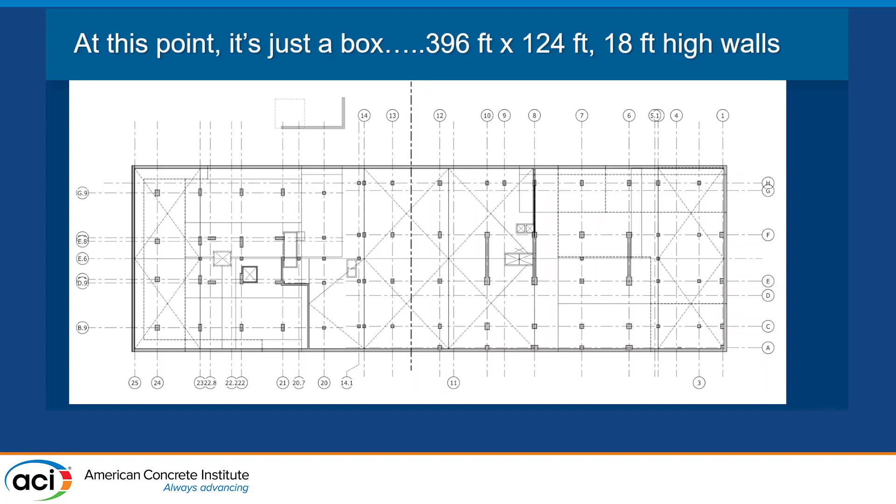Because the two of them go hand in hand—the longer it takes to build a building, the more expensive it's going to be. And it's a pretty simple building, just a box, for goodness sake. It's almost 400 feet by about 124 feet. That's about as simple as it gets, right?

So the concrete contractor says, 'Here's how we're going to do this. I'm going to use one set of forms. I'm going to pour 40 feet a day. I'm going to put the reinforcing in, pack the form up, pour it at 2 o'clock every day. I'm going to come in at 6:30 the next morning, strip the forms, and we're going to do the same thing over and over again.'

How many pours is that going to be? 26 pours, maybe a few days up front and in the back to load in and load out. We're done in 6 weeks. That sounds pretty good because that's a lot of linear footage of wall. So if we start in April with the foundations, we could probably start the walls in May. We're done by Flag Day.

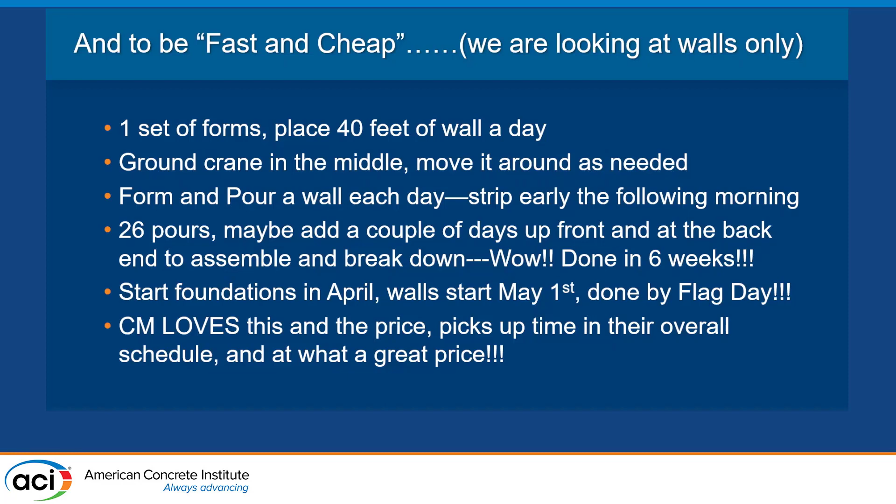And the CM just absolutely thinks this is the best news he's ever heard. He loves it, he loves the price. So he says, this is what we really want to do. The owner's very pleased at this bargain of a price—it literally is the best deal he's ever seen. Now he goes to his A&E team, his licensed design professionals, and they start developing a set of documents. As it flows from schematic to design development, now they have some drawings, plans, and specifications.

And the owner directs it passed on to the construction manager so we can get a reality check on the pricing. These documents are starting to include things like sections and details, more information than a schematic design. The important thing here is the licensed design professional applied their standard details and toolkit, their specification language that they've developed as standard practice. That's what they're comfortable with. It's important because maybe it's a project in their backyard, they're very familiar with the market. Or it might be a project that's not in their wheelhouse, maybe 5 states away, and they have no idea what the standards are in that market.

So it would seem that the licensed design professional read the responsibility in concrete construction document, which has a pretty cool statement here. We're talking about responsibility, right? I'm not going to read it for you, but the key words are, so as to meet the owner's final design criteria. You heard Frank talk about it, you heard Calvin talk about it. Making sure that you're serving the owner to the extent necessary.

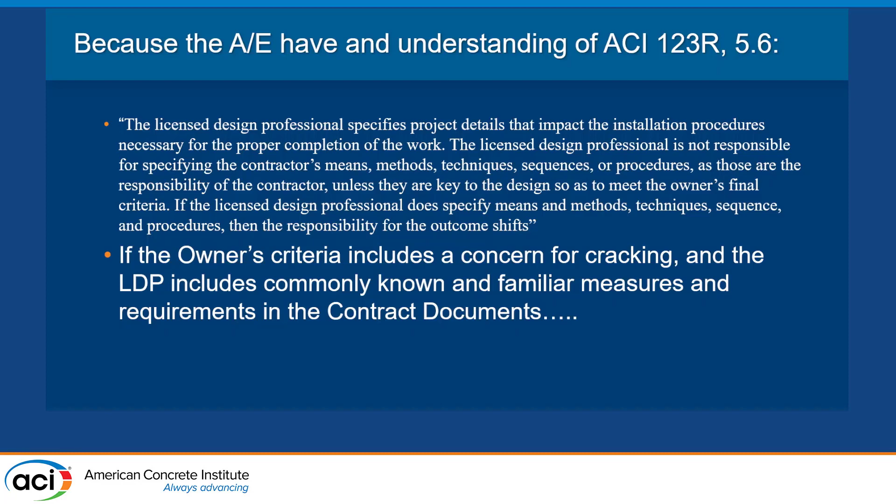And if the licensed design professional does specify means and methods, techniques, sequence, procedures, then the design professional has a little bit of responsibility for the outcome, right? That's what it says. If the owner has a concern for aesthetics or cracking or serviceability, whatever that may involve, the licensed design professional will include those measures with which they are familiar, and they put them in these documents, included in their judgment for crack control.

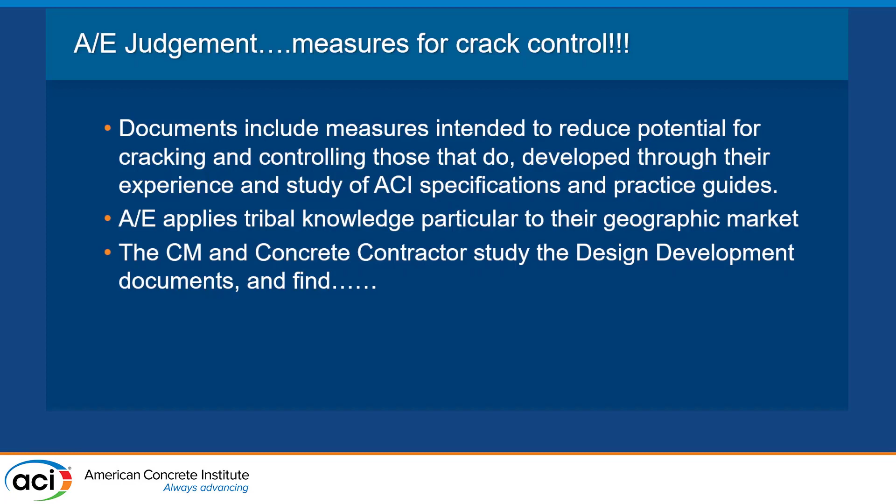And we're talking walls only here, by the way. You saw some pictures from Frank and Cal that talked about slabs and other things, mass concrete, but we're just going to talk about walls because it's really easy, and it narrows the field as to what could possibly be a cause. So they're going to include the measures they've found to reduce the potential for cracking, not stop the cracking, control the cracking, reduce the potential for uncontrolled cracking. They're familiar with the ACI specifications and practice guides, have some tribal knowledge of their market, and they issue some documents. So the construction manager, concrete contractor, get a look at the drawings.

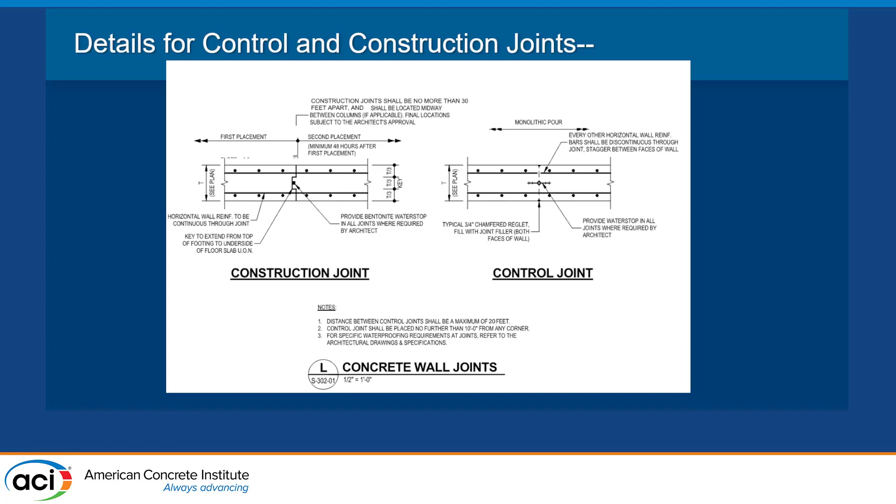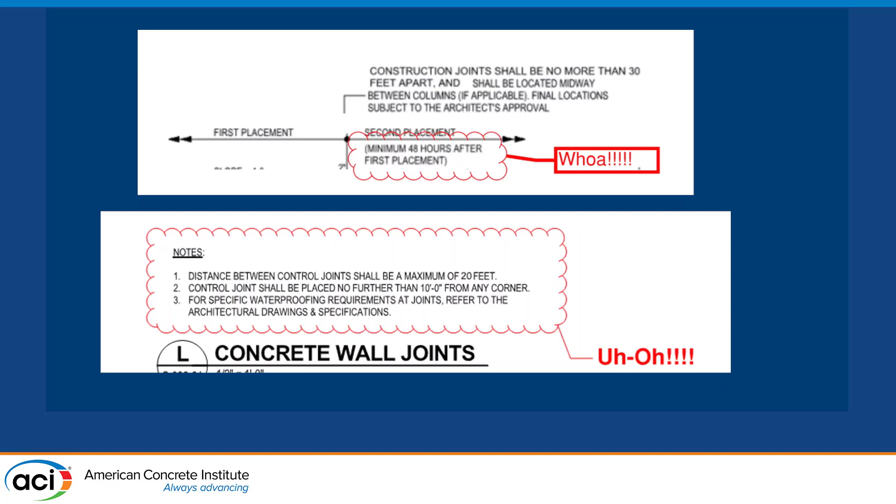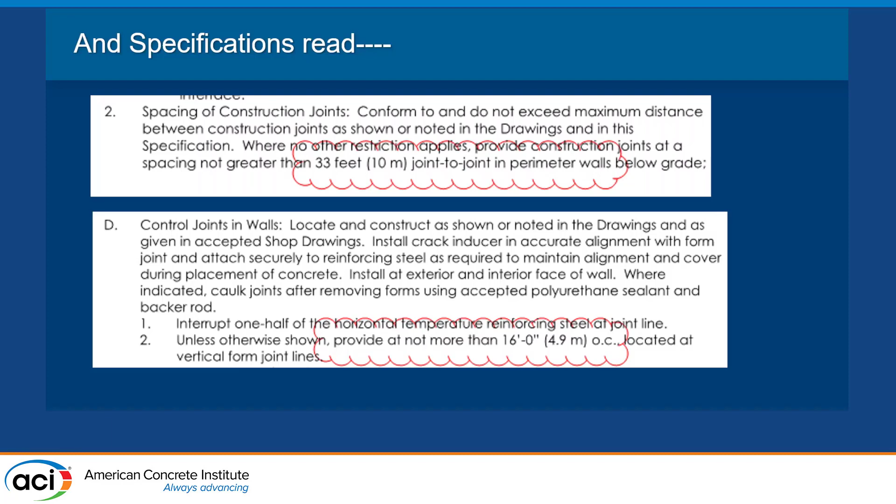And then they start digging into the specifications, and okay, it's a little bit of a conflict, because on the drawings they said 30 feet, and in the specification it says 33 feet, okay. Maybe that's closer to 10 meters, and they like working in SI units. But anyway, not more than 16 feet between control joints. So, is that a change?

Another thing that pops up is, okay, well, you got to leave the forms on until you hit 50 degrees at 36 hours. Maybe that's not so bad, it's May into June, we're good, right? But then, leave forms in place for the full curing period. Okay.

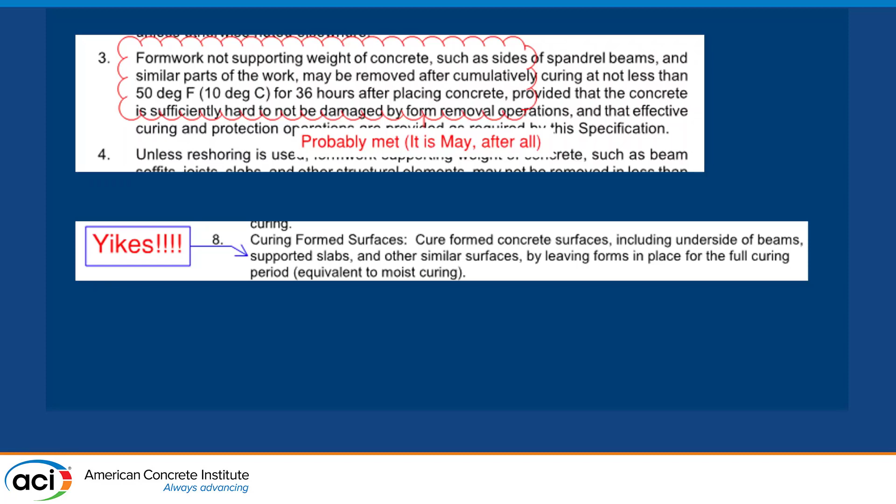Are these a problem? No, they're all reasonable measures to minimize the potential for uncontrolled cracking. Is it a change? It's a change as far as the CM and the concrete contractor are concerned, based on how they perceive the owner's perceptions. But now they're going to limit the wall pour to 30 feet, control joints to 20 feet, 48 hours between adjacent wall pours. That's the killer, and I mentioned something about time is money.

Think about that. But it actually is a great solution to allow some initial shrinkage to occur in a finite length of wall before you lock it into any adjacent walls, right? I don't know how many people do that, but we see it from time to time from some design professionals because they know it works for the work that they do. Leave the forms on to allow the best curing. It's not a change, it's actually good practice, isn't it? But it's not what they imagined for the fast and cheap solution, right?

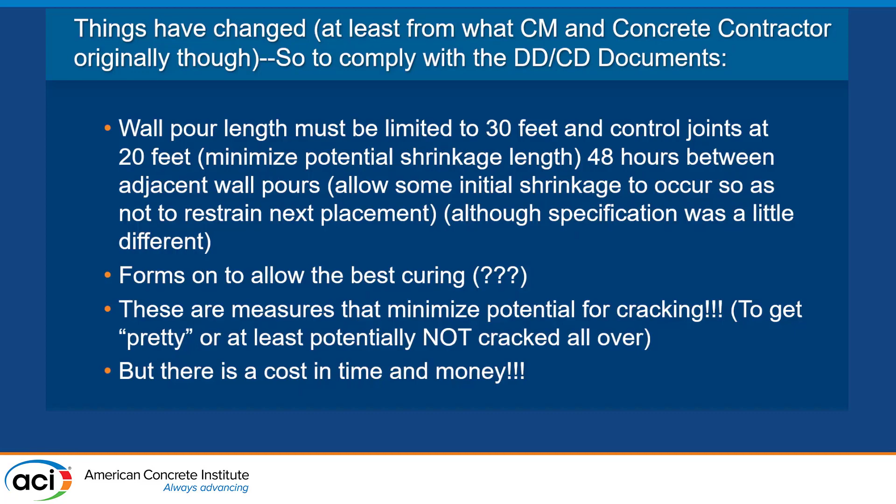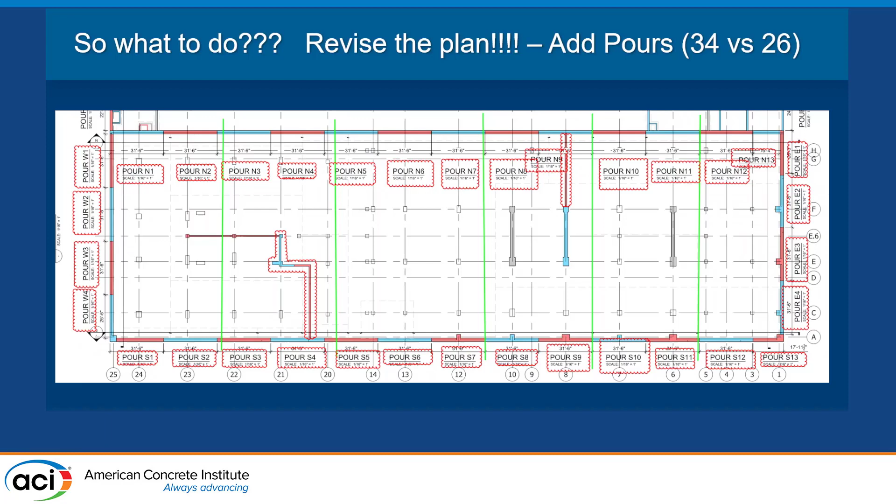So we go from 26 pours to 34. What does that mean? Is this really a change in requirements? From the AE point of view, it's not a change, because that's what they always thought the owner wanted. But from the CM and concrete contractor's point of view, it's a change from what they perceived the owner wanted. So it's a fact.

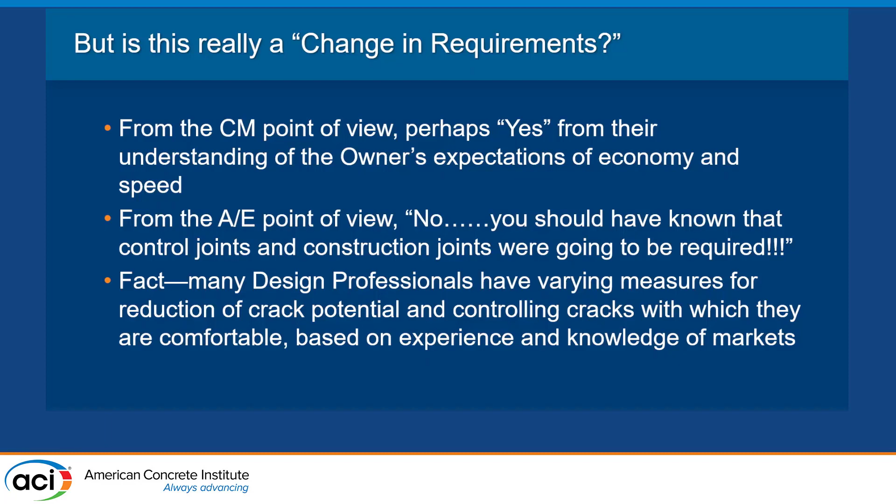Many design professionals have many different tools in their toolkit for minimizing the potential for uncontrolled cracks, and it's going to vary with experience and time. So these stipulated prescriptive measures that are in the construction documents are really going to extend the wall schedule, and that's going to impact a lot more than just the concrete part of the project. Because now at 34 pours, we're going to have to separate the pours by a day to meet that 48 hours between adjacent pours.

We've added pours, so we're going to add a few days at the front and back. It's going to stretch us out to 15 weeks. That's a lot of time. And guess what—that takes us from nice early summer weather into the dog days of August. Does that imply there's now a requirement for hot weather measures?

It's a change from the contractor's point of view. So what can we do to dial that back in? Can we add a second set of forms, a second crane? That way maybe we can pour every day by hopscotching from area to area. That's going to cost money, and it would tie up a ton of real estate inside the building pad, which means no other trades can get in there—the plumber can't get in, the electrician can't get in to run duct bank. It's an impact, and it's going to cost time and money.

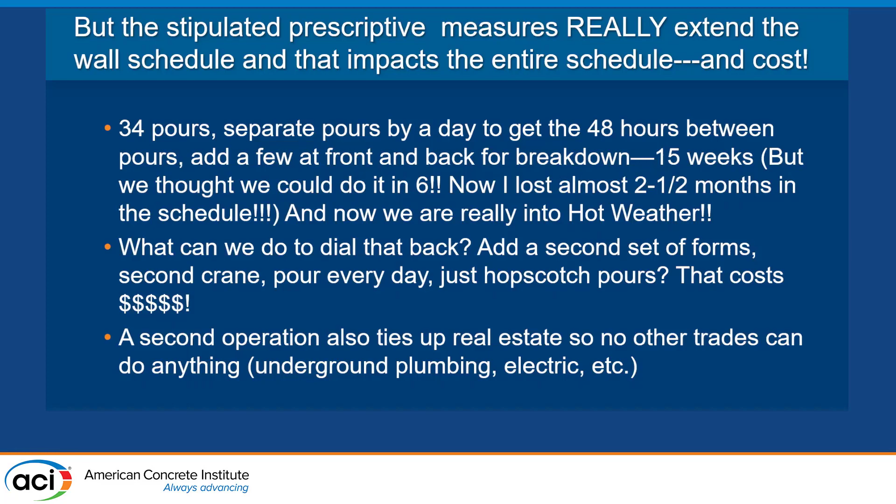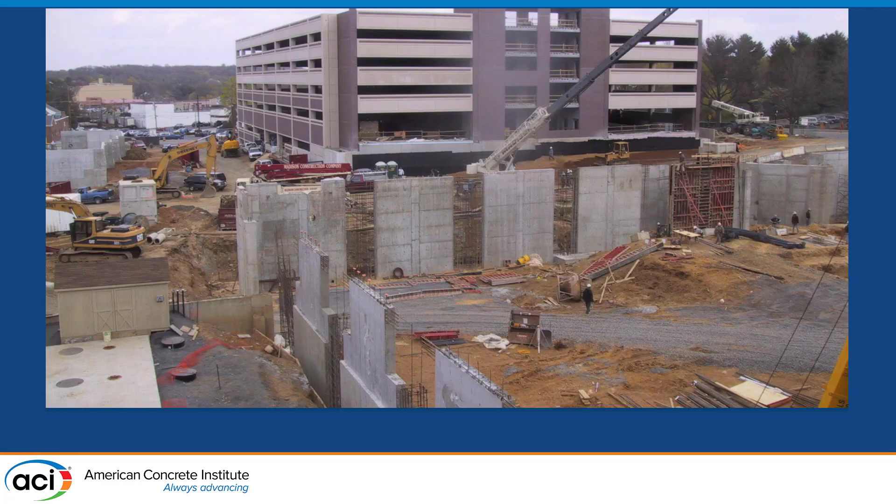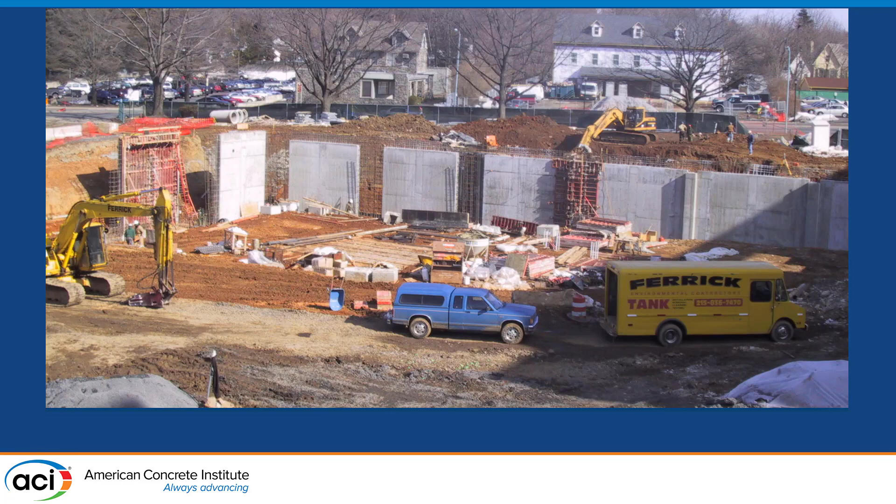So things have changed. All of a sudden this job site, which would have been a home run, now has two cranes, and look at all the litter all over—that's all formwork and reinforcing steel to try to get two wall crews going. Now we're going to hopscotch in between. We're going to pour these straight walls, then have a second crew come in with another set of formwork to follow behind two days later. That's what it's going to look like, and it's going to tie up a lot more space because now you have that much more equipment.

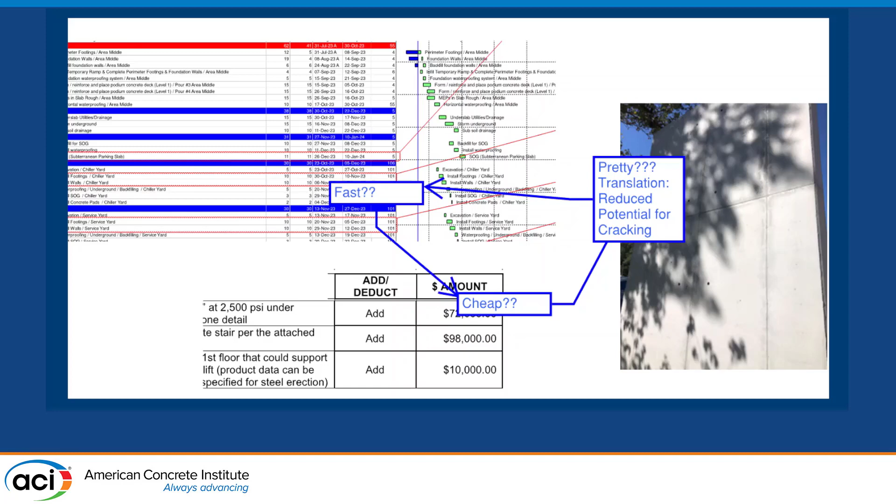But these are all measures acknowledged to work towards minimizing the potential for uncontrolled cracking. You don't think about these things when a design engineer is in an office preparing a set of documents. So the translation is fast, cheap, pretty—no cracks in this wall, but a lot of adds there with 5-6 figures, and fast, maybe. Which one rules?

So from the contractor, concrete contractor, and construction manager's point of view, things have certainly changed. Now let's talk about some potential outcomes. Say the decision is made to proceed with the original concept plan made at the schematic phase, which would basically ignore all the measures that the design professional incorporated into their perception of the project. Just say the owner is on board with that—much as Frank Malice is saying, the owner is now educated, and that's a key thing.

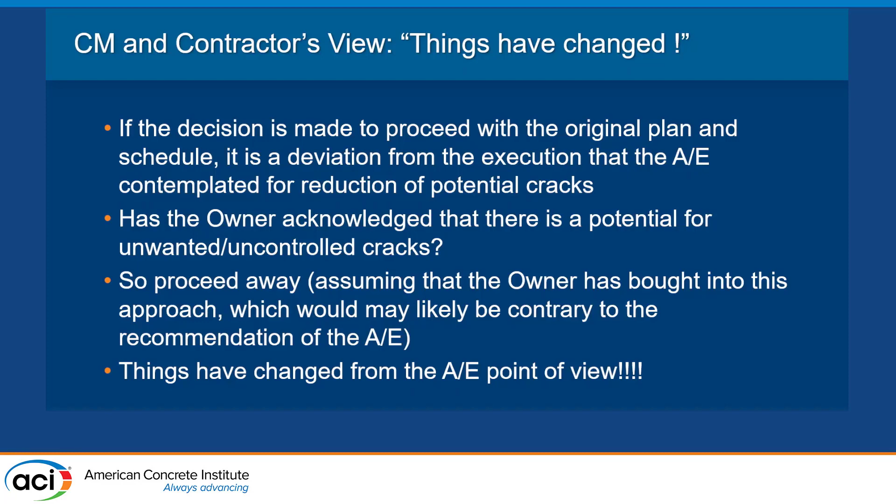So here we go—we're going to go ahead and build this. The owner's bought into the approach, which may be contrary to what the design professional is recommending. Things have changed from the A&E's point of view.

So let's go back to ACI 123R and note that the general contractor, and you heard Frank and Calvin allude to this, has the responsibility to construct the project in accordance with the contract documents and with the appropriate standard of care for general contractors in the geographic area of work. This paragraph happens to apply to general contractors, but you can pull that word general out and just call it contractor.

So if the features intended for crack control are now omitted or ignored, whichever way you want to call it, in favor of cost and schedule, is a licensed design professional free and clear? I would say yes, because technically the contract documents have changed. Has the owner bought into this approach? That's one of the keys. If the owner hasn't bought into this, if this is being done behind his back, then shame on everybody.

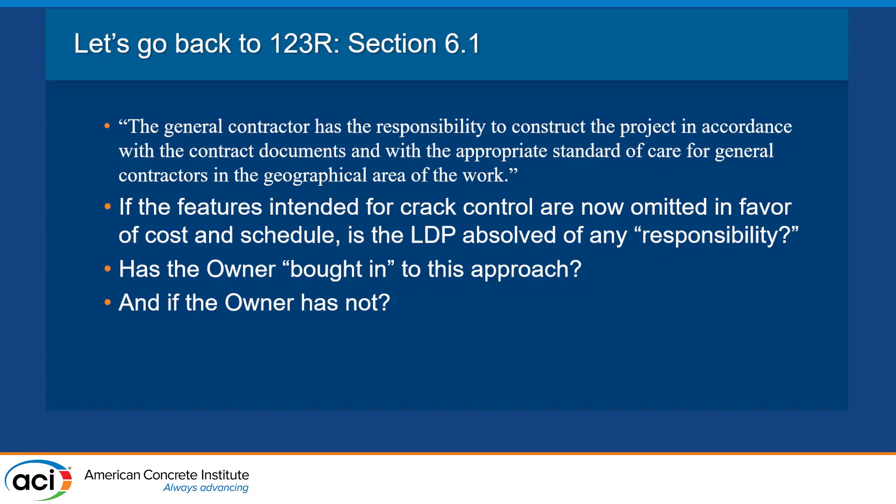And if the owner's not informed, let me get back to this. So there's one of two outcomes for it. Just say they plow ahead, 40 feet, strip every day, bang, bang, bang, and there's no cracks. Hallelujah, we are heroes. Nobody's talking about responsibility at that point because there's no uncontrolled cracking to worry about. The requirements of the walls changed, but the outcome was successful.

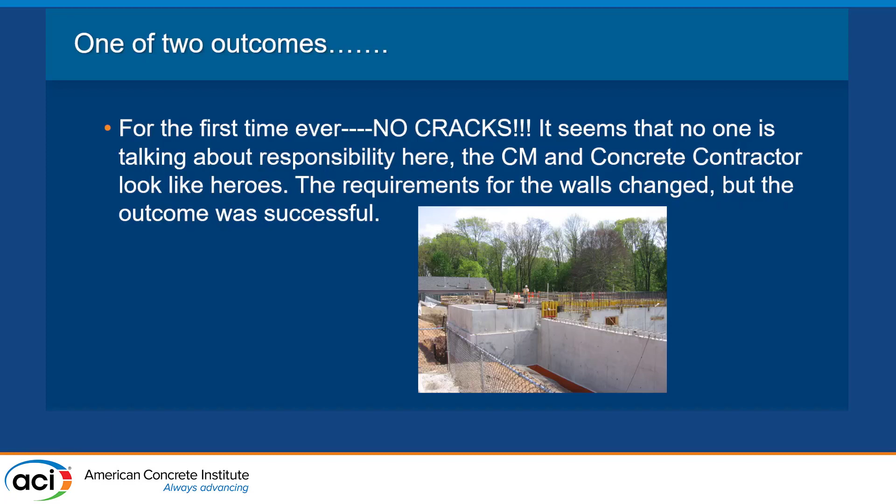Bang, everybody's happy. But what if they actually followed the contract documents that the A&E, the licensed design professional, prepared, that incorporated delays between pours, much tighter spacing on construction joints, tighter control joints? And there's no cracks, then everybody again is great. But it costs a little more money because you saw that schedule extended, and obviously renting more formwork, 2 cranes. So the team would have applied commonly known effective measures to reduce potential for cracks, and they still appeared.

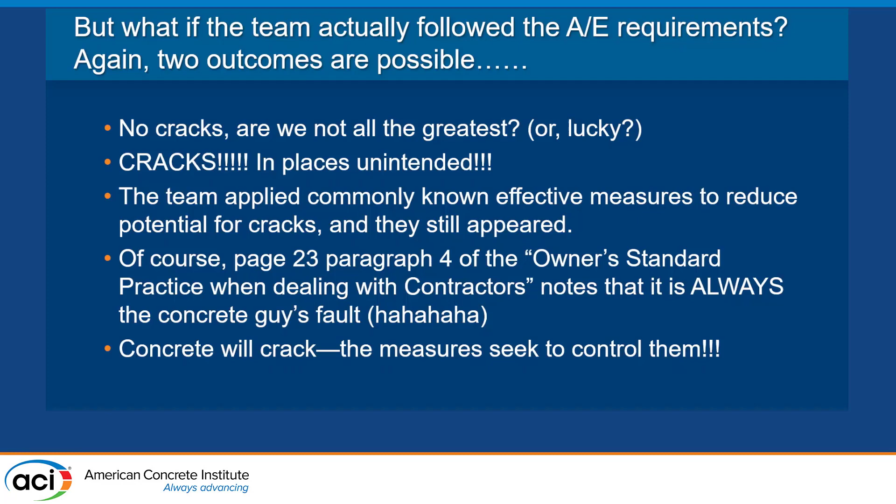So this is if cracks had actually occurred. So if you go to page 23, paragraph 4, the owner's standard practice when dealing with contractors, which is entirely resident in my head, it notes that it's always the concrete guy's fault. And I think obviously anybody who's been building in concrete has heard of that statement. So the concrete's going to crack, the measures that everybody applies to control that cracking is good.

So say that they plowed ahead with a 40 feet pour every day, strip as soon as you can, and it cracks. Well, you could say that the construction manager and the concrete contractor are therefore responsible because it was their decision to knowingly deviate from the execution that was perceived by the licensed design professional. I'm leaving the word owner out of this. If the change was endorsed by the owner, there may be some responsibility there. But if it was really a construction team going cowboy and ignoring all the provisions that were incorporated by the design professional, then certainly there's responsibility on the contractor's side.

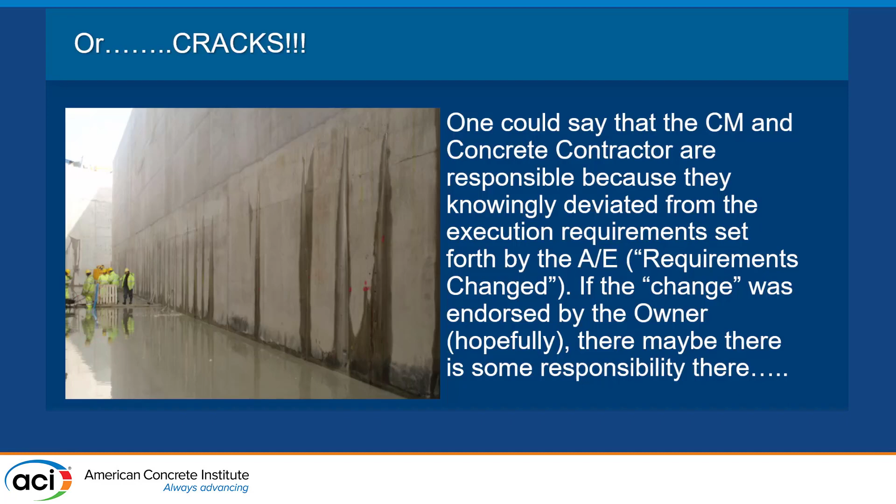So I'm not sure how many people see contractors that knowingly ignore altogether any details or specification provisions or prescriptive requirements intended to attain a reduced potential or limited potential for cracks to occur. If they're doing that, that's their responsibility. On the other hand, another scenario.

Just say the construction manager contractor enter a hard bid on those documents, and the bid documents include all that, but they say, Mr. Owner, I can save you a lot of time and a lot of money. Deliver your building 3 months earlier if you let us do what we want to do. The licensed design professional may say, ooh, I don't know about that. But the concrete contractor says, you know what? I know, and I'm going to repair cracks if and when they occur. It's my risk, my responsibility.

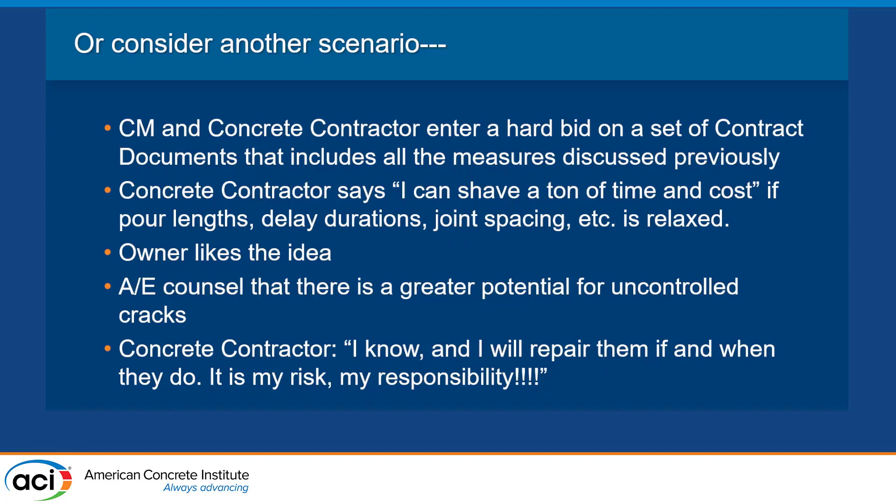That's really a good approach. It's a good business approach where there's risk, there's reward. Concrete contractor may make a lot of money if he takes that risk. Because just as the AE has knowledge of measures to limit and control cracking that does occur, the contractor might have a few bullets in his holster there and ready to go.

He knows he has a ready-mix supplier that has pretty good shrinkage characteristics based on testing over a period of years. I'm not certain that one cycle of testing is meaningful in reporting a shrinkage value for a particular concrete mix. I think you need testing over time. I understand there were some questions about that earlier in the presentation, but certainly if you have something that you know works over and over again, and you've successfully built walls pouring 40, 50 feet at a time, you have knowledge that now lets you take risk.

And that's an important difference to understand: knowingly taking risk versus being a knucklehead and not knowing anything and taking risk. He's ready to do a superior job with curing. He has a few tricks—likes to add rustications, maybe because it helps him strip the formwork better, who knows. Crack inducers, a really cool accessory that really works. Maybe he happens to have a Conex box full of crack inducers from a job he bought materials for that didn't go forward. You don't know that, but he does.

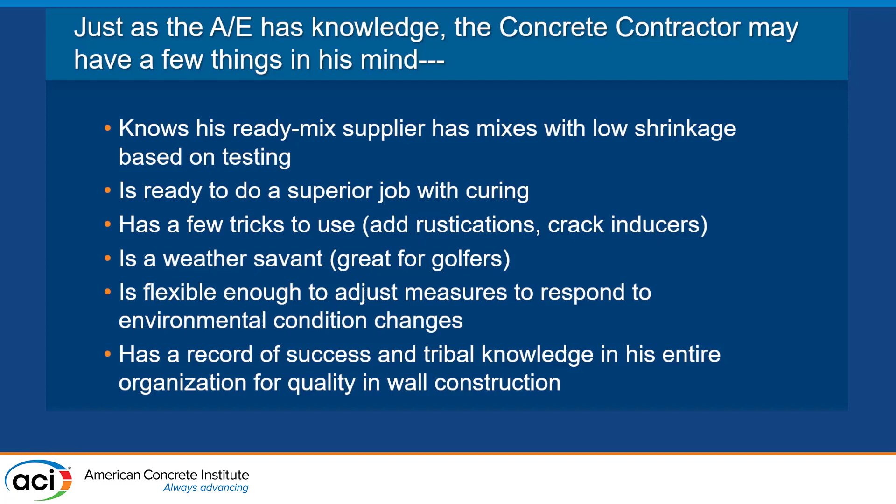And he's flexible enough to adjust measures to respond to changing environmental conditions. Because it's one thing to have typical details and specification language that could be a little draconian, but it gets really draconian when the weather changes—in other words, when you go from hot, or not hot and not cold, to either hot or cold. Things are changing there. And the contractor has a record of success and tribal knowledge in his entire organization to do this successfully. So it can work.

So this crosses the line in illuminating the difference between the performance aspect of a design and prescriptive design—stipulating curing, stipulating where the joints have to be, what configuration they have to be, as Frank Malits was saying. That's prescriptive, where you're telling the contractor exactly what to do. Whereas performance is: build me a wall, and then I don't want to see any cracks—or I don't want to see uncontrolled cracks, I think that's a better term.

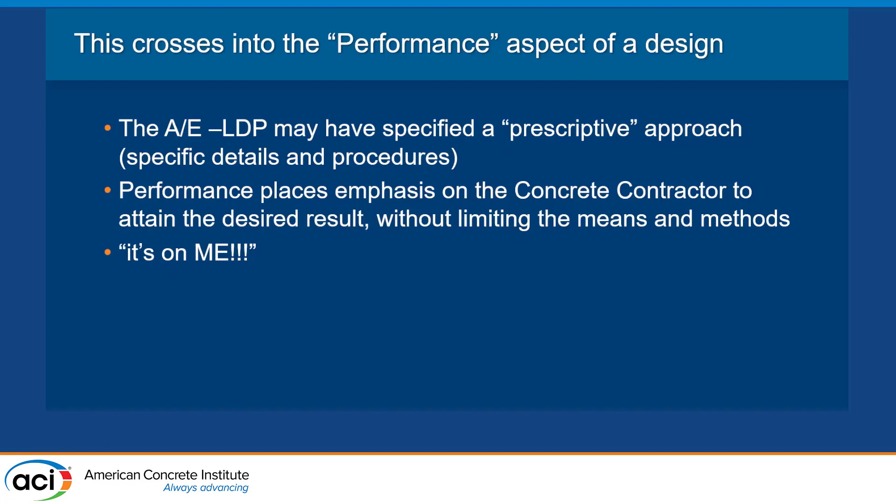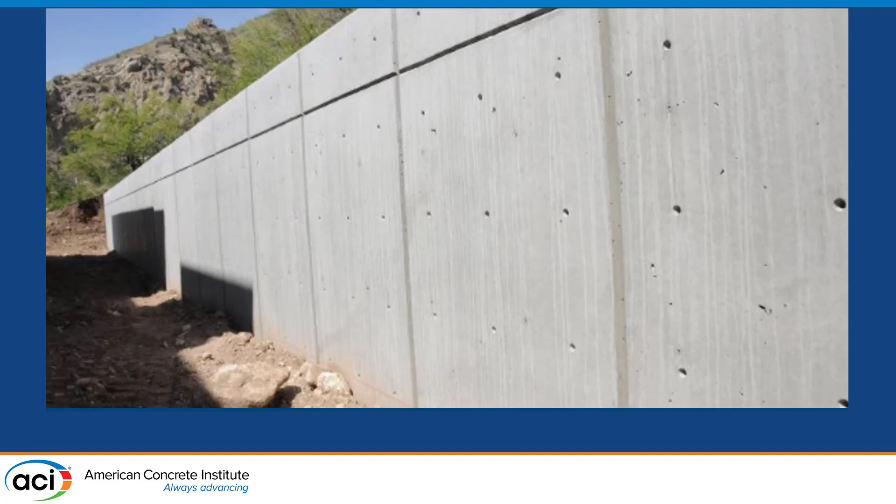So the concrete contractor may say, I can do that, it's on me, it's my responsibility. So here's an example of a wall. I don't have a whole lot of figures, some really cool ones like Oscar had, but I do have walls. This was built 65 feet long, with rustications—there's a little bit of sand streaking on the front, but it didn't crack, or if it did, the cracks are hidden in those rustications. Ain't that great? This is an example of two different things happening at the same time.

So what are some other cases where requirements have changed, and how does that affect responsibility? Schedule changes: if walls were to be built in spring or milder weather and they get pushed into summer, or maybe even farther into winter, is a concrete contractor responsible for a schedule? I don't necessarily agree with that unless it's been negotiated and stipulated with the construction manager or the general contractor. But certainly that's something that has to be discussed.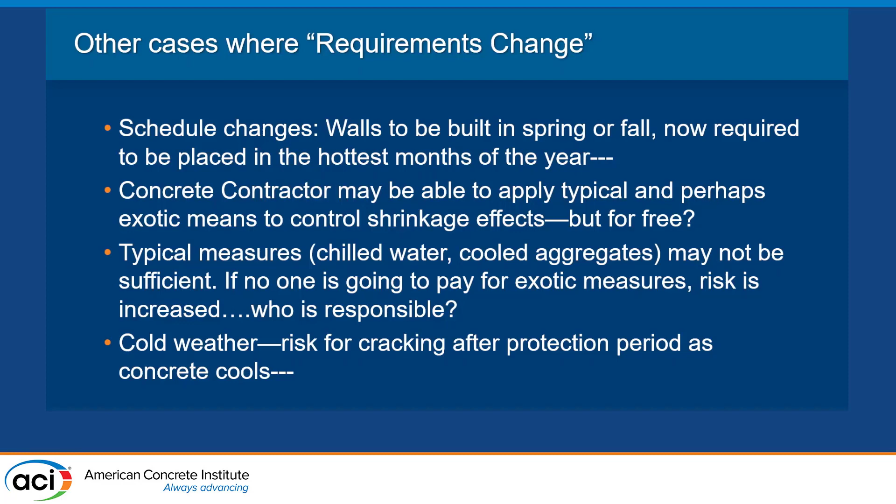And now we're going to talk about communication, because that is even more important than any details. The concrete contractor may apply typical and perhaps exotic means to control shrinkage effects, but should that be free? Should he be looking at type K cements or shrinkage reducing admixtures, SRAs? Stuff ain't free. Typical measures in the summer—chilling water, cooled aggregates—may not be sufficient for some types of construction. If nobody's going to pay for exotic measures, the risk is increased that things aren't going to turn out exactly the way everybody wanted. Who's responsible? And in cold weather, again, there's a risk for cracking after the protection period, and this is one of our jobs where protection was not continued sufficiently enough.

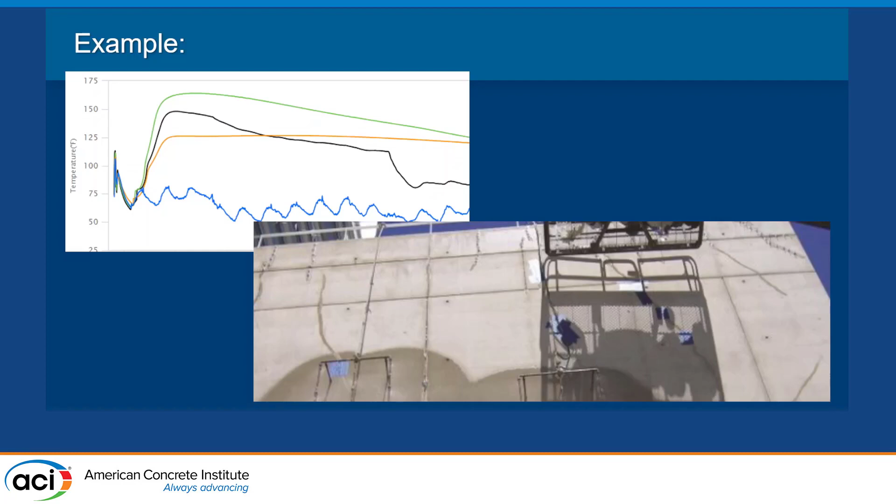That black line, you can see how the temperature just plummeted after the forms were removed and the protection was removed, and we got some weird cracking. That's what can happen.

So when requirements change, risk must be examined. It has to be assessed. With regard to concrete cracking, changes in execution requirements may serve to increase or decrease the risk. It depends which direction things are flowing, whether it's coming from the contractor wildcatting or the contractor making suggestions with a benefit to other people. Certainly that needs to be discussed.

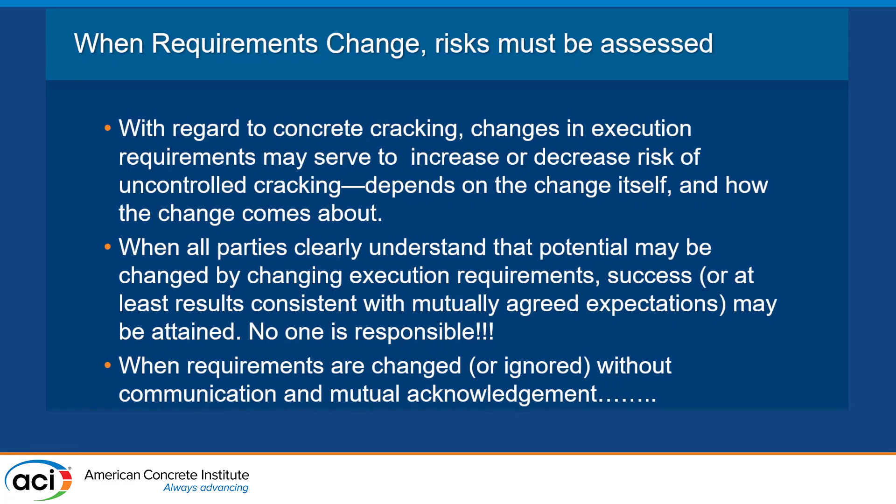When all parties clearly understand that the risk may be changed, either increased or decreased, by changing execution requirements, maybe we can be consistent with mutually agreed upon expectations. This gets back to communication that you heard Calvin and Frank talk about. No one's really responsible if you're all on the same page about what might happen and how we are going to deal with it. But when requirements are changed or ignored without communication, that's when there's going to be discussions about responsibility.

Then you get into the oak paneled room that Frank Mallitz is talking about. Things are going to get nasty. If you think back to the triangle, you can have two of the three, and you need to be discussing with those two. Communication is the key. Again, you've heard it again and again and again. Align expectations, then the responsibility can be appropriately allocated.

Because in every endeavor, there's risk, and with risk comes responsibility. It's the people taking the risk that then have to assume the responsibility. If the owner decides to roll the dice and say, go ahead, pour me 60 feet of wall a day, I don't care about cracks, that means the owner has accepted the risk of that cracking occurring, or at least uncontrolled cracking occurring. So making sure that any change made to requirements needs to be assessed, because that's going to identify who's responsible.

Within the 132 report, there's another great comment. Section 6.6 discusses a pre-construction meeting. The general contractor should schedule, et cetera, et cetera, et cetera. I disagree with that, and I'm on the committee. I think it requires a lot of meetings. It can't just be one meeting.

In fact, you should be meeting long before construction is even scheduled to start, to begin to discuss expectations and try to get everybody on the same page, because that's the only way you're going to have success when it comes to cracking. And it's especially important, if a requirement changes, man, you better meet again and make sure everybody understands the ramifications of a change, whether it be a change in schedule, change in methodology, or change in execution.

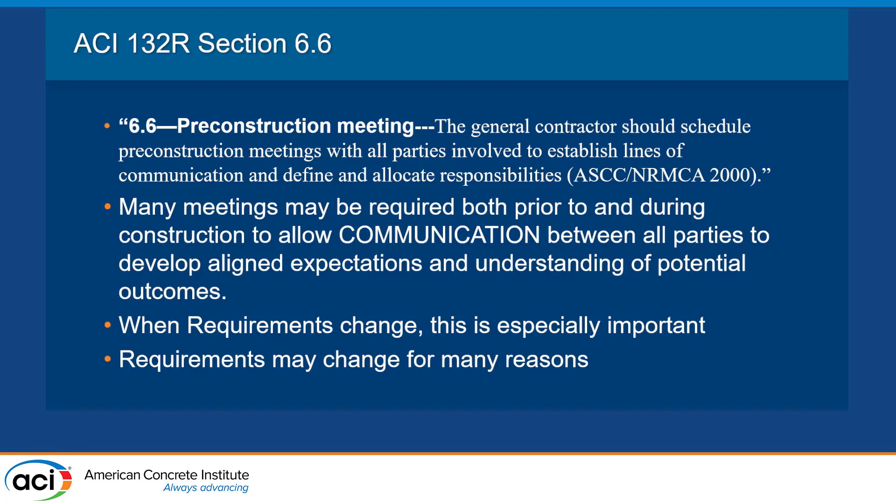Requirements can change due to design changes. Hey, they want to add another floor to the building, or they want to add another 400 feet of wall. Great. Value engineering. I think there should be something written up somewhere about the whole concept of value engineering — if you want to reduce the cost of this project or take time out of the schedule, there is an effect. There's going to be a change, and there's going to be some reallocation of risk.

Weather, holy cow. Schedule acceleration, it has become really obvious. Supply chain issues, I think those are beginning to sort themselves out. Two years ago, I think we had a hard time getting some materials that did have an impact on projects. And I'm specifically talking about crack inducers, which is why we wound up with a Connex box full of them.

And when quality issues are identified that are inconsistent with those expectations — you heard Frank talking about when a crack is really important to deal with. So just for fun, to close out, Frank mentioned a type of crack that I don't think is really difficult to determine who's responsible for.